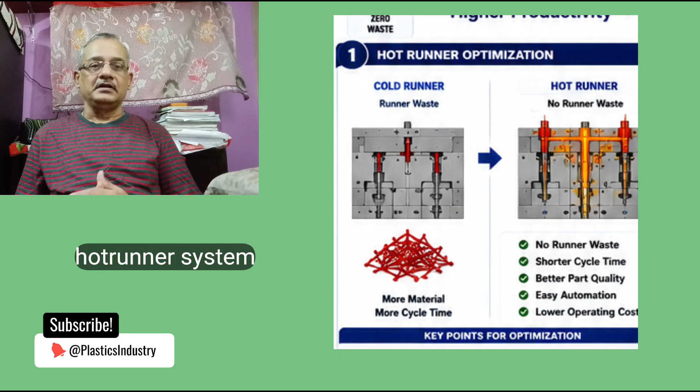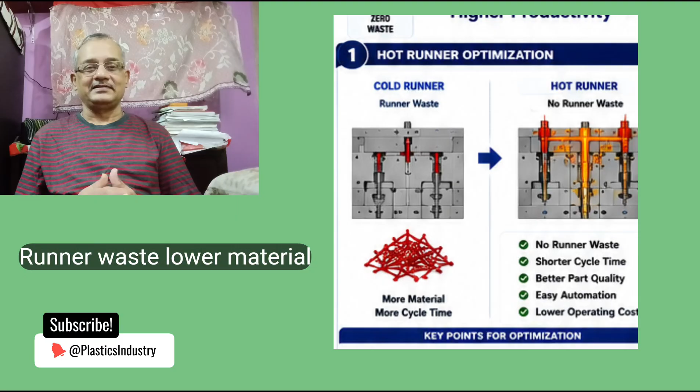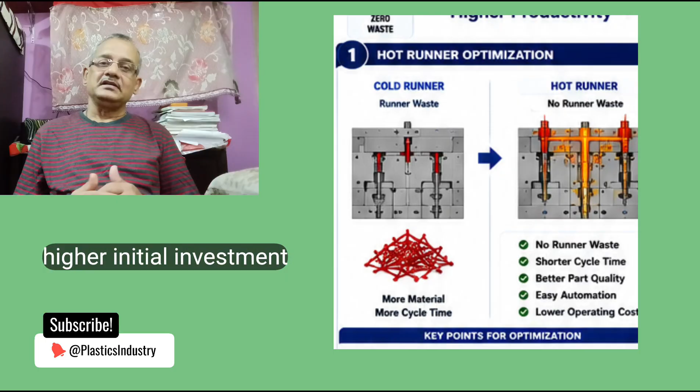A hot runner system keeps plastic molten inside the runner using heated manifolds and nozzles. Advantages: no runner waste, lower material consumption, faster cycles, better aesthetics, easier automation. The challenge is higher initial investment, temperature control is critical, and maintenance is more complex.

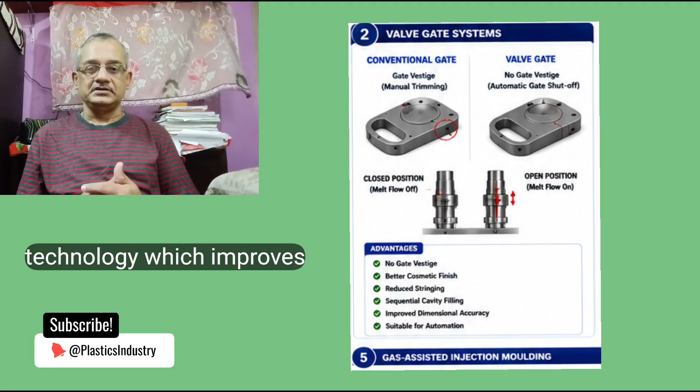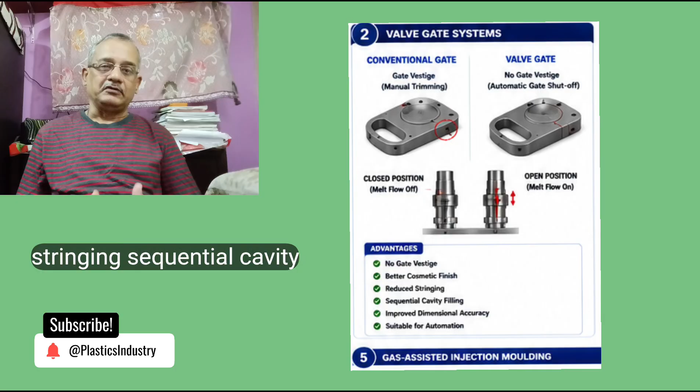Valve gate system is another technology which improves productivity. Valve gates use a mechanical pin to open or close the gate precisely. Benefits: no gate vestige, better cosmetic appearance, reduced stringing, sequential cavity filling, improved dimensional consistency. Widely used in automotive bumpers, medical products, consumer electronics, and packaging.

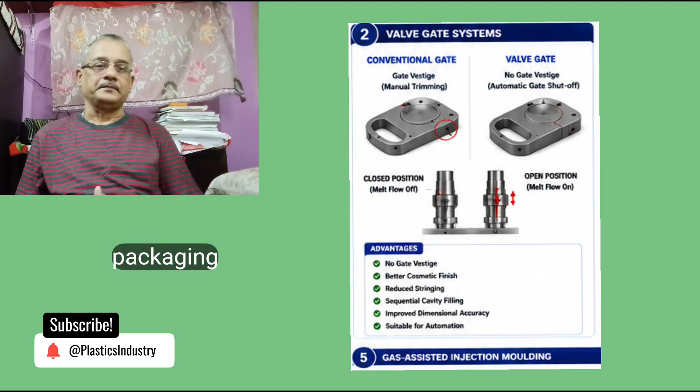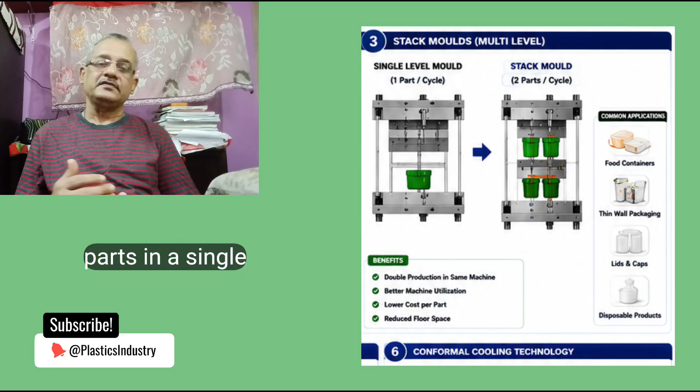Next technology is stack molds. Instead of one parting line, stack molds use two or more molding levels, meaning one machine can produce twice as many parts in a single cycle. Benefits: increased productivity, better machine utilization, reduced cost per component. Applications include food containers, thin walled packaging, and disposable products. Using stack molds, productivity has increased many times.

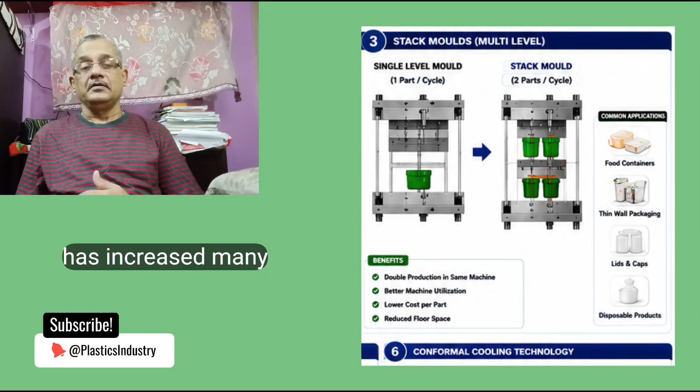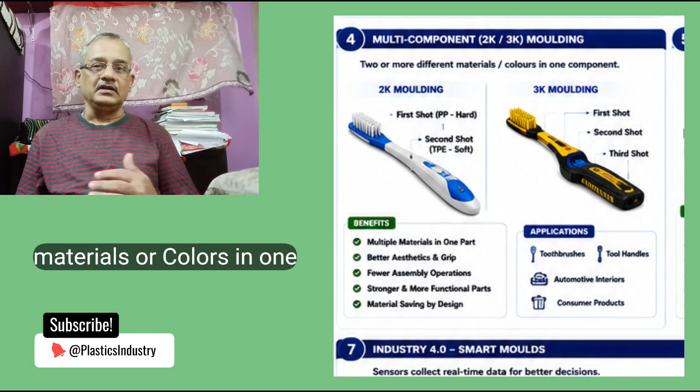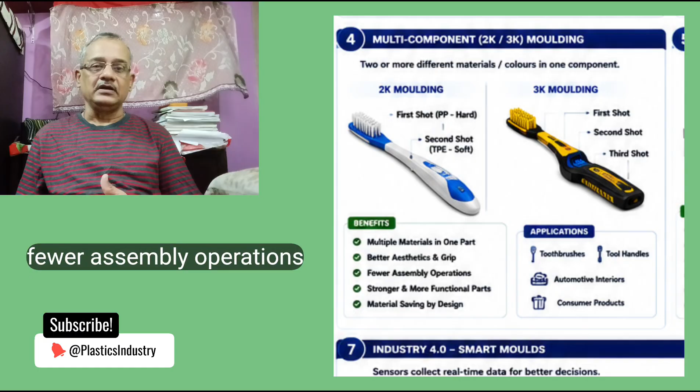Next is multi-component, 2-color, 3-color injection molding system. 2-shot molding combines different materials or colors in one component. Examples include toothbrushes, power tool handles, automotive interiors, soft touch grips, and medical devices. Benefits: fewer assembly operations, better aesthetics, improved product functionality.

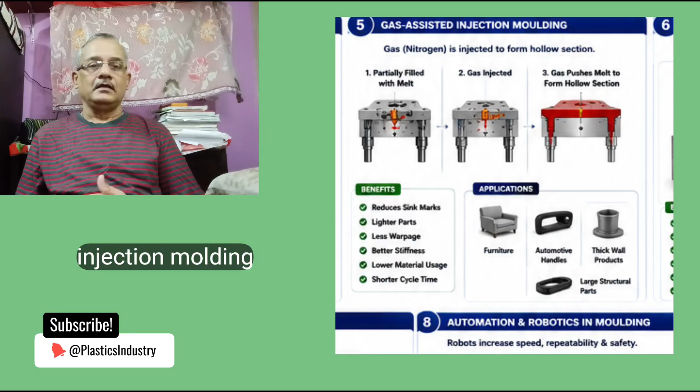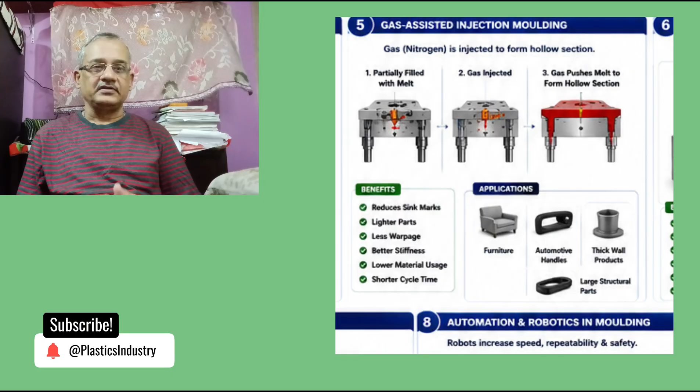Next technology we will discuss is gas assisted injection molding. After partial filling, nitrogen gas is injected into the melt, forming hollow sections within thick parts. Advantages: reduced sink marks, lower part weight, better stiffness, less warpage, reduced material usage. Common applications include furniture, automotive handles, and thick structural components.

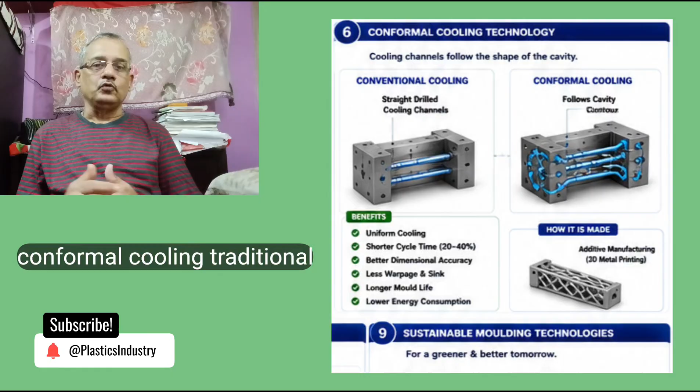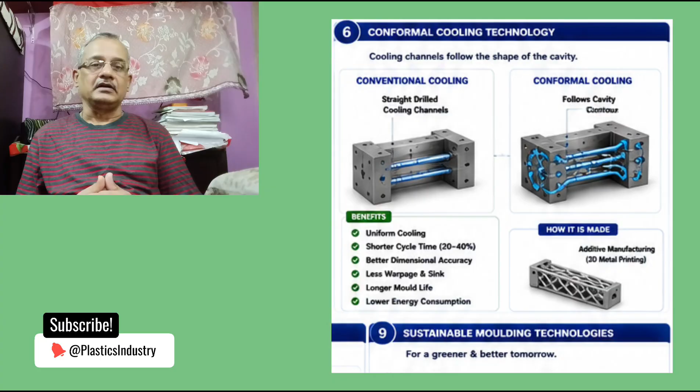Conformal cooling: traditional cooling channels are drilled in straight lines, while conformal cooling follows the exact shape of the cavity, often produced by metal additive manufacturing. Benefits: uniform cooling, reduced cycle time, lower warpage, better dimensional accuracy, improved productivity. This is one of the biggest advancements in modern mold design.

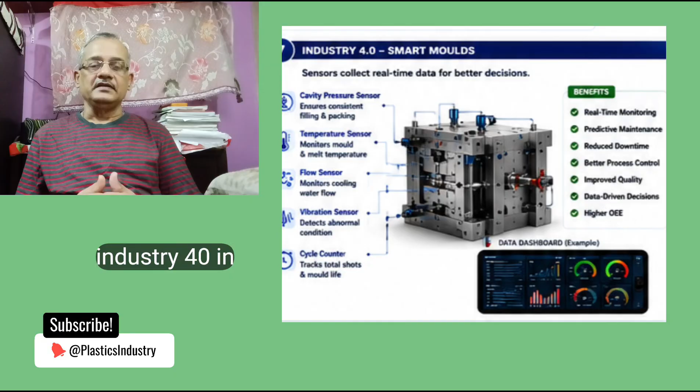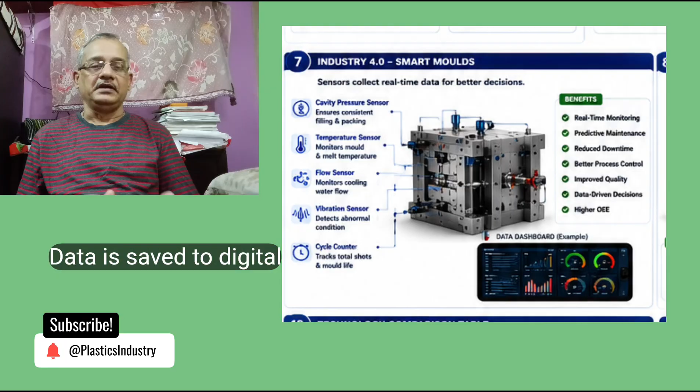Industry 4.0 in injection molding. This is very important, and the trend is towards this. Modern molds can include sensors that monitor cavity pressure, temperature, cooling efficiency, cycle count, and vibration. Data is sent to digital dashboards for real-time monitoring. Benefits: predictive maintenance, better process control, reduced cycle time, reduced downtime, improved traceability.

Automation and robotics: robots are increasingly used for part removal, insert loading, in-mold labeling, quality inspection, and packaging. Automation reduces labor dependency and improves consistency.

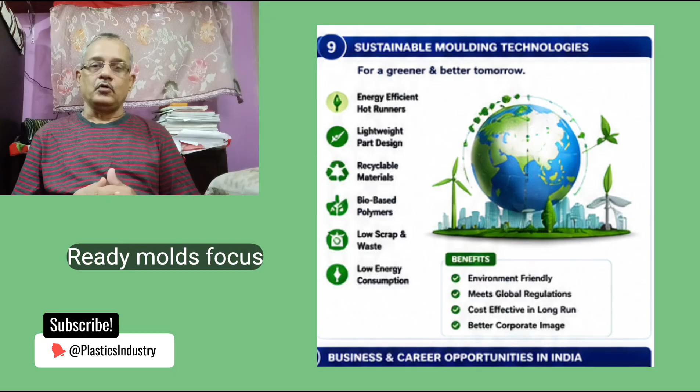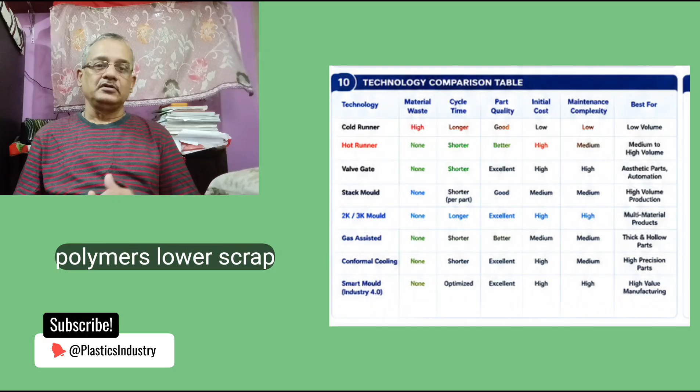Sustainable molding technologies: future-ready molds focus on energy-efficient hot runners, lightweight part design, recyclable materials, bio-based polymers, lower scrap generation, and faster production with reduced energy consumption. Sustainability is becoming a competitive advantage.

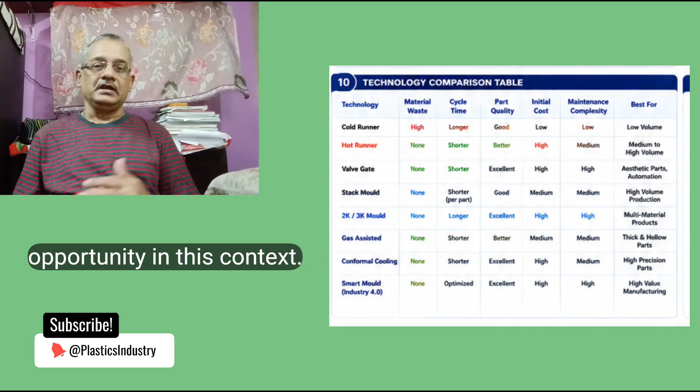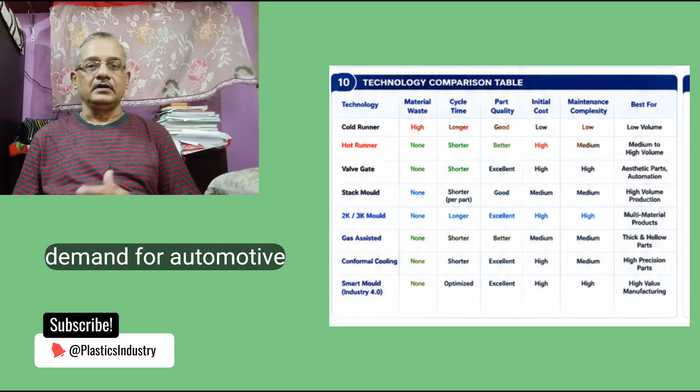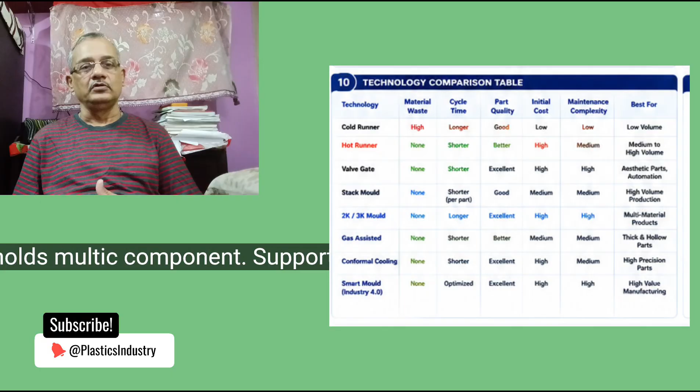India's opportunity in this context: India is rapidly becoming a global manufacturing hub with initiatives like Make in India and growing demand for automotive, electronics, medical devices, packaging, and consumer goods. There is tremendous scope for precision mold manufacturing, hot runner integration, medical molds, multi-component molds, and export-oriented tool rooms. This is an excellent opportunity for entrepreneurs and skilled engineers.

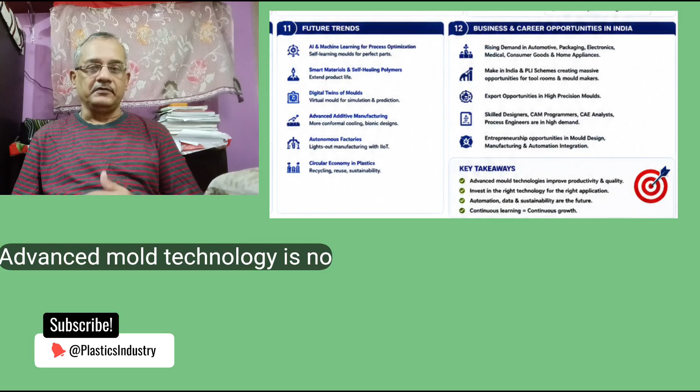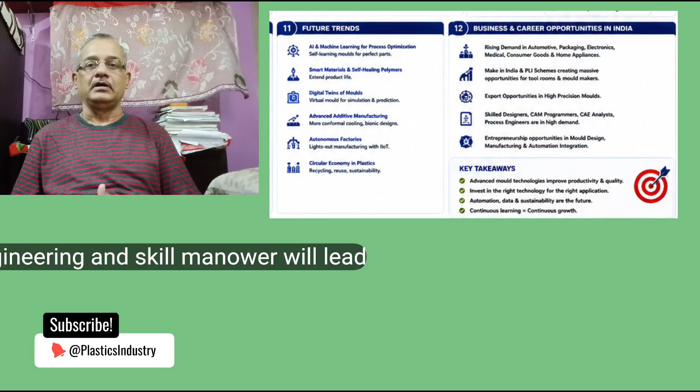So friends, let us conclude what we have learned today. Advanced mold technology is no longer optional; it is becoming essential for global competitiveness. Companies that invest in innovation, automation, precision engineering, and skilled manpower will lead the next generation of manufacturing.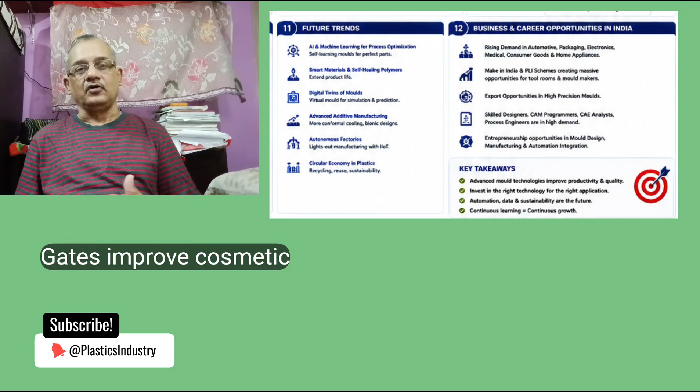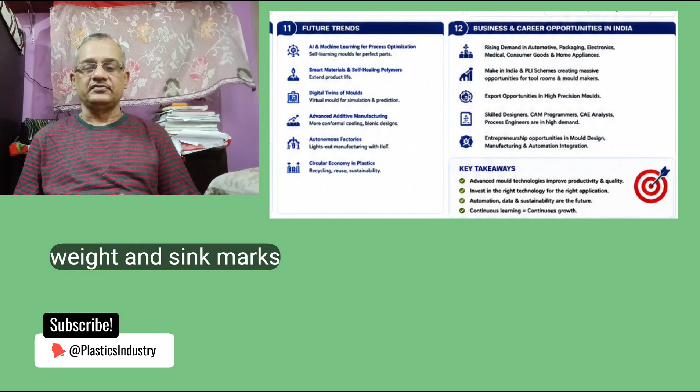Key takeaways from today's discussion: hot runners eliminate runner waste, valve gates improve cosmetic quality, stack molds multiply production, multi-component molding combines materials in one process, gas-assisted molding reduces weight and sink marks, conformal cooling shortens cycle time and improves quality, and Industry 4.0 enables smart molds and predictive maintenance.